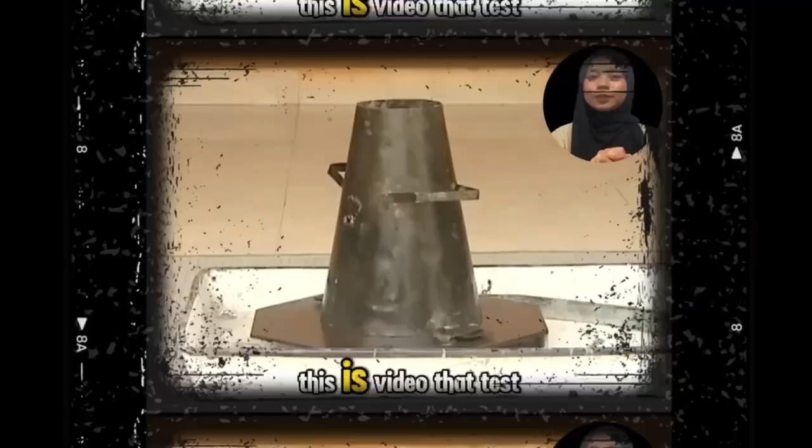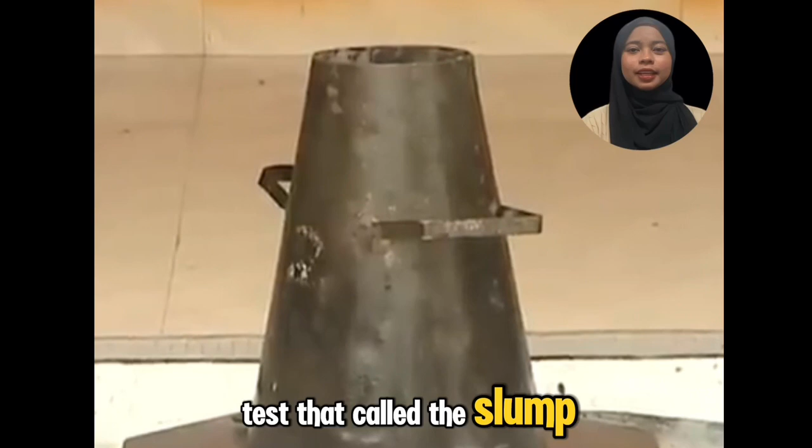This is a video that tests for workability of concrete. The ease with which one can work with concrete is called workability. This can be measured using a simple test called the slump test. This video will show the procedure. The slump test is simple and always used on site to assess the workability of a concrete mix. The test should be conducted at the beginning of concrete operations.

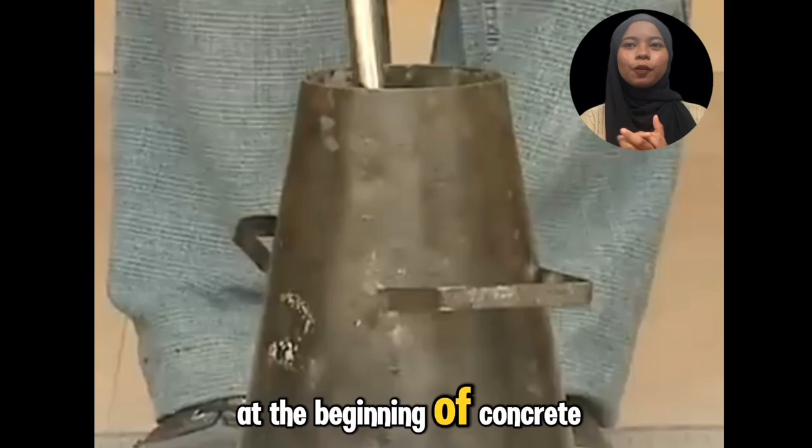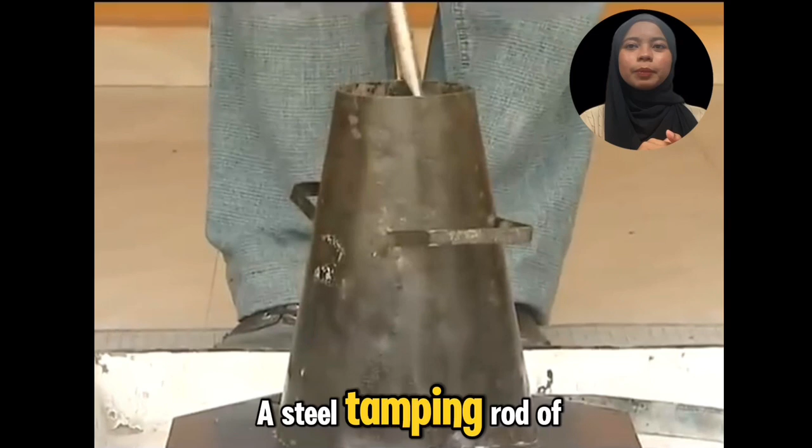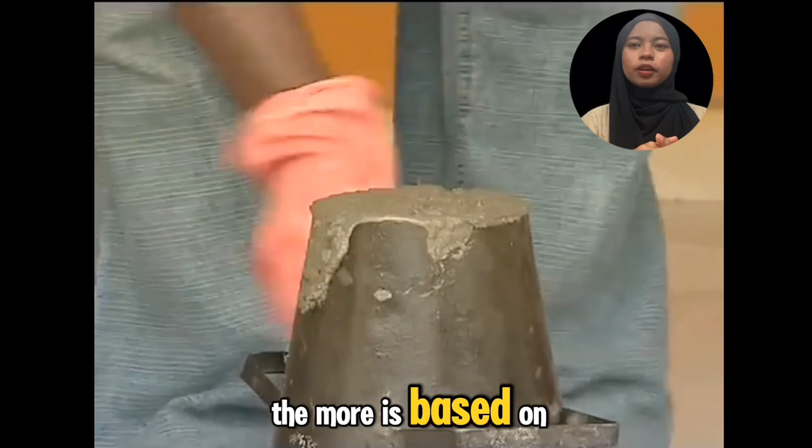The apparatus for conducting the slump test essentially consists of a metallic mold in the form of a frustum of a cone with a base plate. A steel tamping rod of 16mm diameter and 60 cm height is to be used for compacting. The internal surface of the mold should be thoroughly clean of moisture. The mold is placed on a smooth, horizontal, rigid and non-absorbent surface.

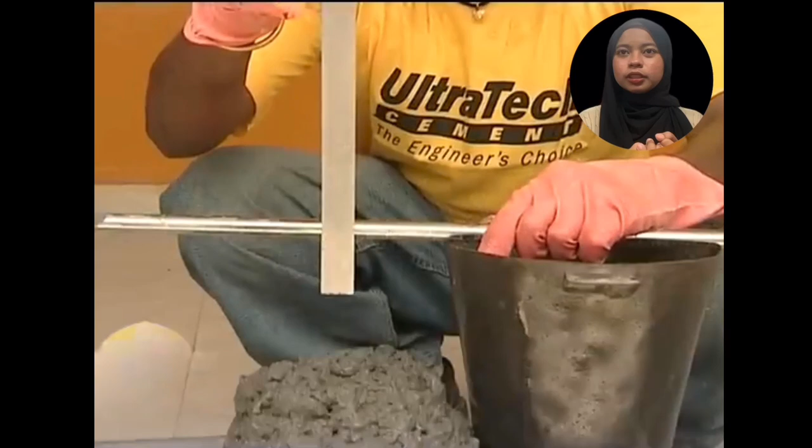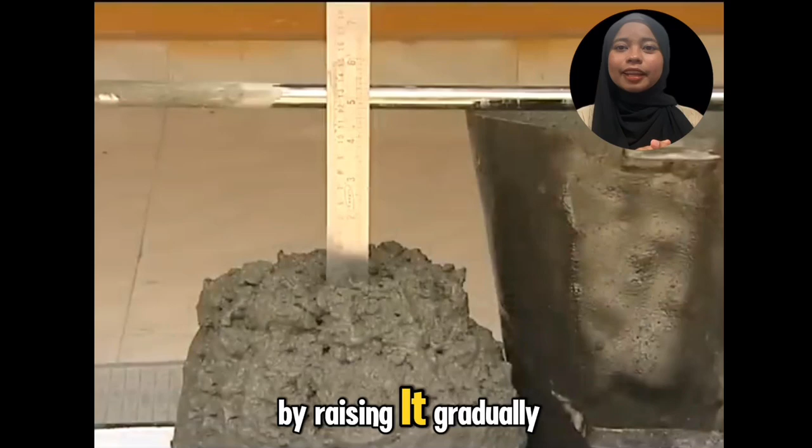It is then filled in 4 layers with the thickness of each layer being more or less 1/4 of the height of the mold. Each layer should be tamped 25 times evenly. The concrete is leveled with a trowel so that the mold is filled exactly to the top. The mold is then removed by raising it gradually. This operation should be carried out without any jerk and vibration.

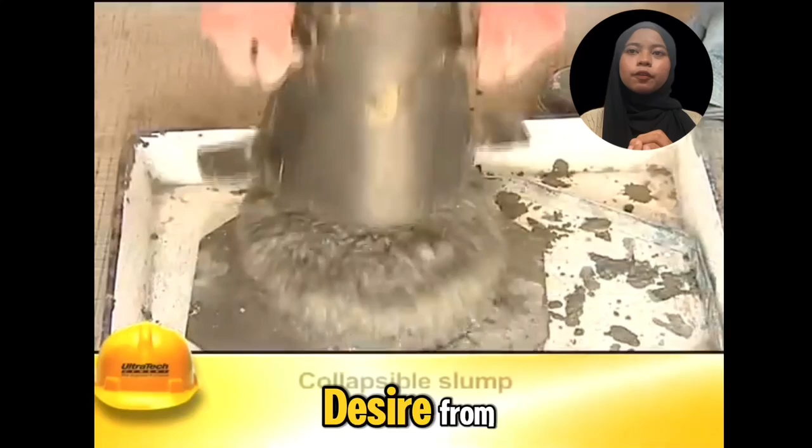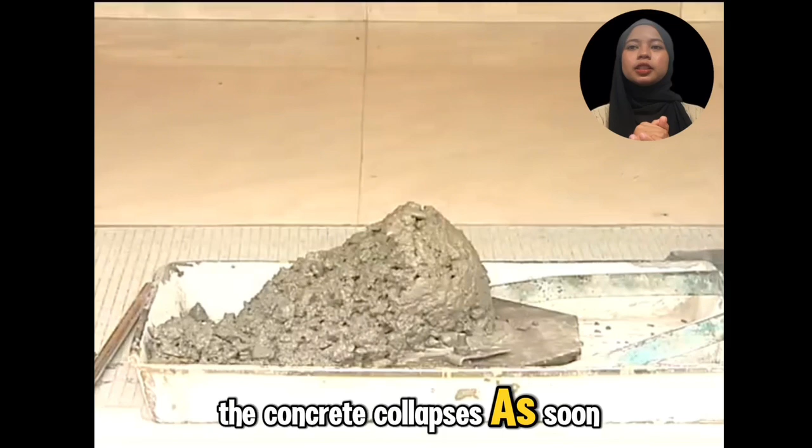The slump may either be a true slump, shear slump or collapse slump. The true slump is the desired form, a slump that we require. In harsh mixes, the concrete slides in an inclined plane. This is known as shear slump. In collapse slump, the concrete collapses as soon as the cone is removed, usually occurring in very wet mixes. Concrete demonstrating near a collapse slump is considered unsatisfactory.

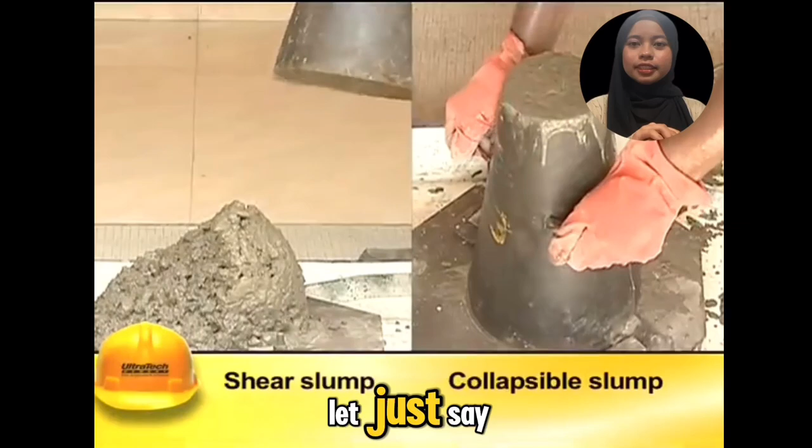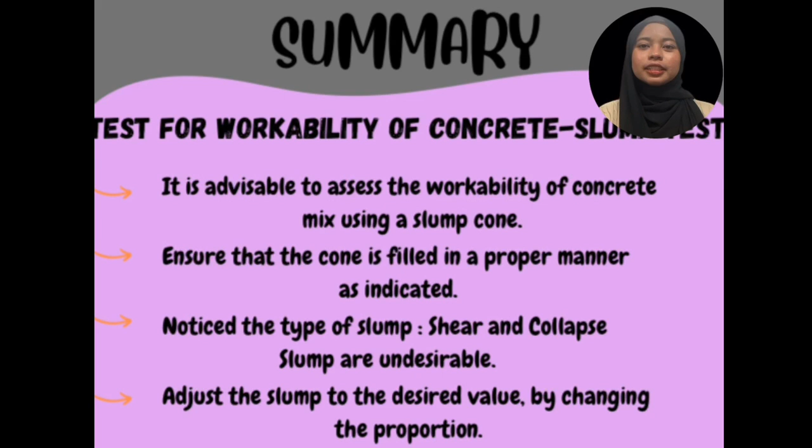In case of a slump result beyond the specified limit, the mix proportion needs to be adjusted, especially the water content. For the summary of tests for workability of concrete: first, it is advisable to assess the workability of a concrete mix using a slump cone. Second, ensure that the cone is filled in a proper manner as indicated. Third, notice the type of slump. Shear and collapse slumps are undesirable. Lastly, adjust the slump to the desired value by changing the proportion.

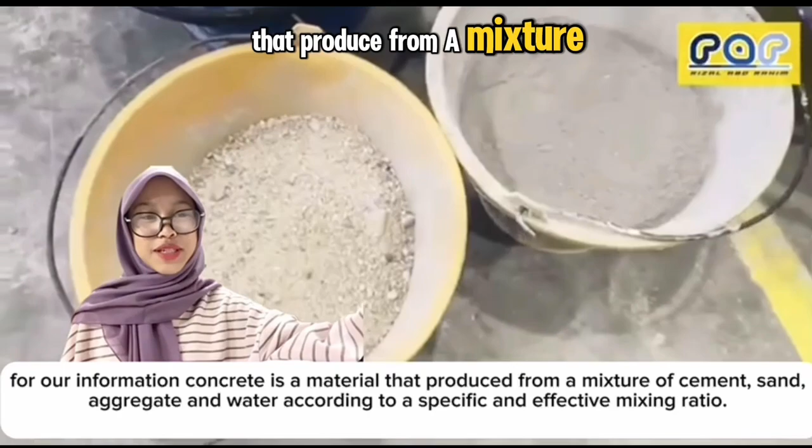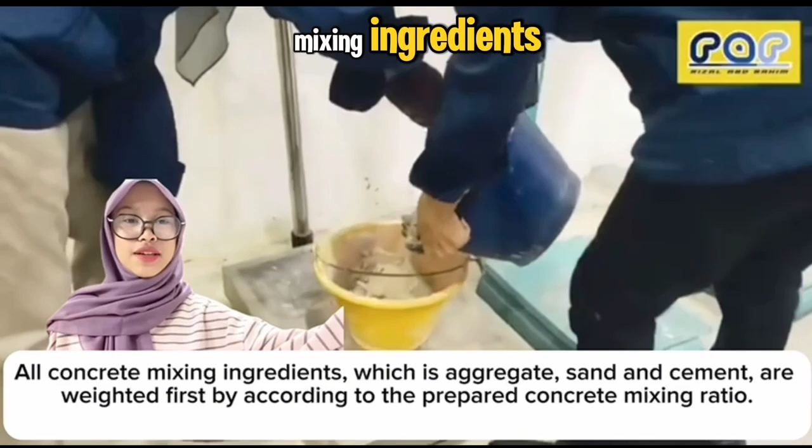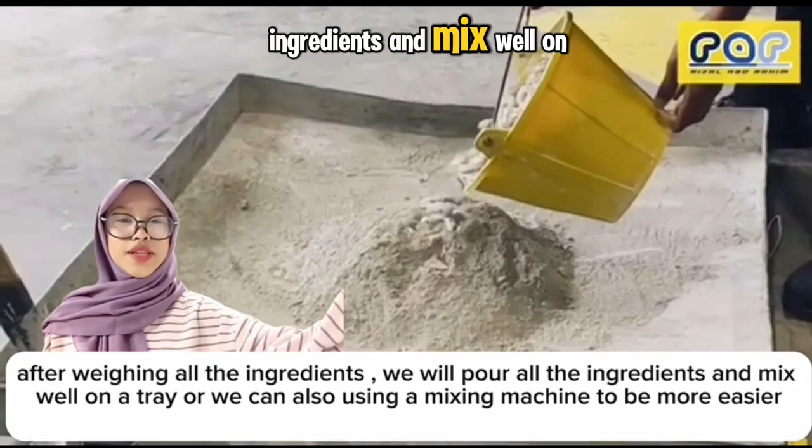For our information, concrete is a material produced from a mixture of cement, sand, aggregate and water according to a specific and effective mixing ratio. The equipment required is a shovel, trowel, compaction rod, compaction machine, and a concrete cube mold made of steel. First, the concrete mixing ingredients, which are aggregate, sand and cement, are weighed according to the prepared concrete mixing ratio. After weighing all the ingredients, we pour them and mix well on a tray, or we can use a mixing machine to make it easier.

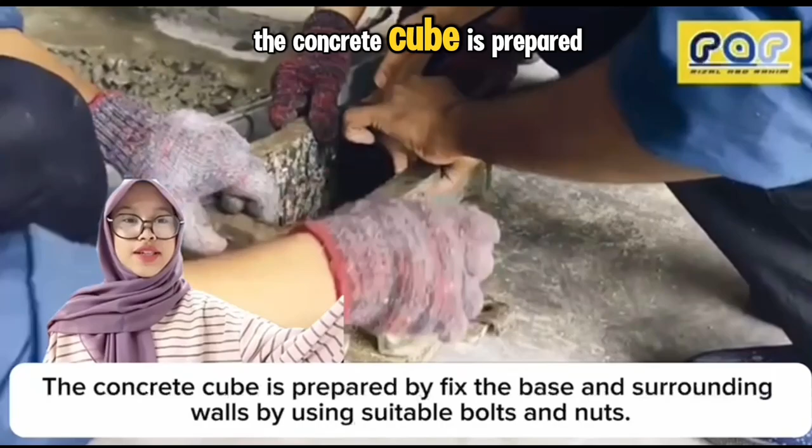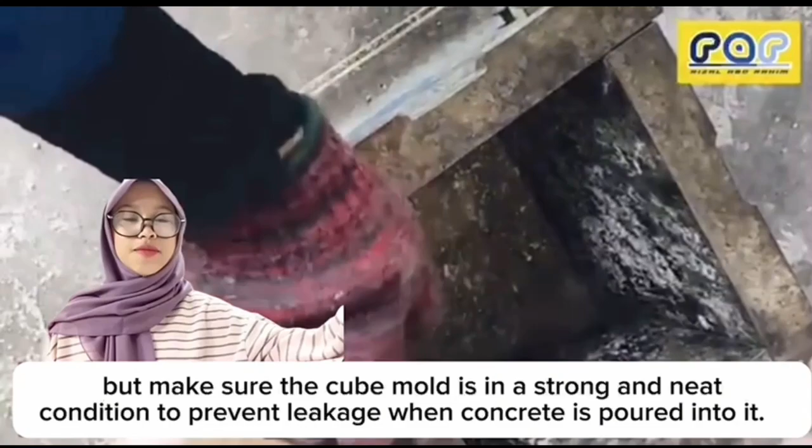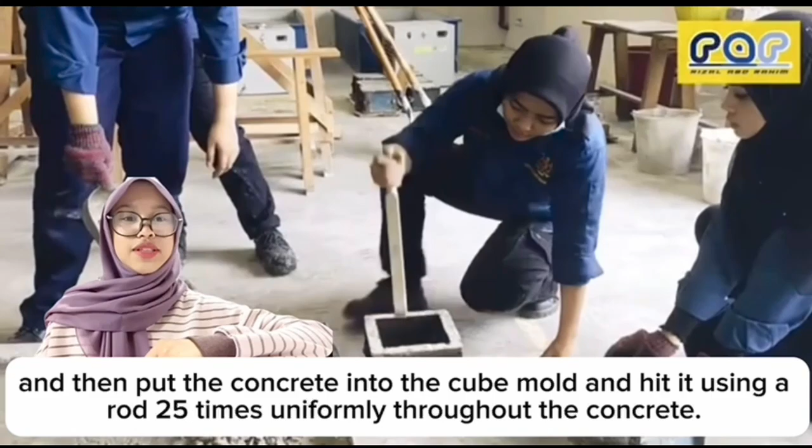Next, add clean water according to the proper ratio and mix all until smooth. The concrete cube is prepared. Fix the base and surrounding walls using suitable bolts and nuts, but make sure the cube mold is in a strong and neat condition to prevent leakage when concrete is poured into it. Then the inner surface of the cube is rubbed with grease or oil first, and then put the concrete into the cube mold and compact it using a rod 25 times uniformly throughout the concrete. This step is repeated on the second and third layers until the concrete cube mold is full and solid.

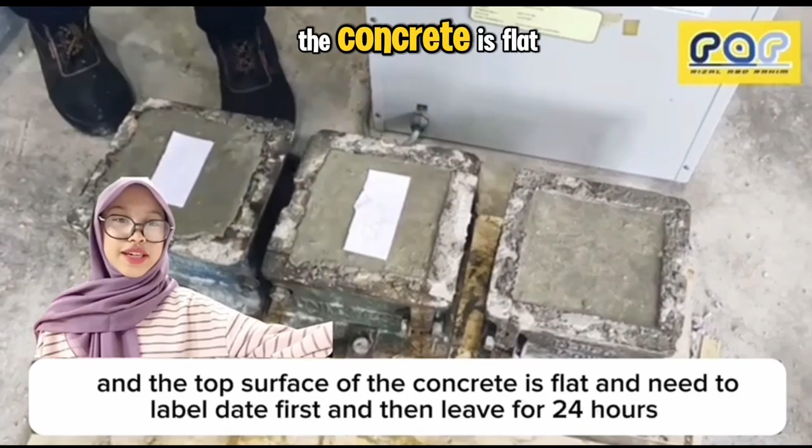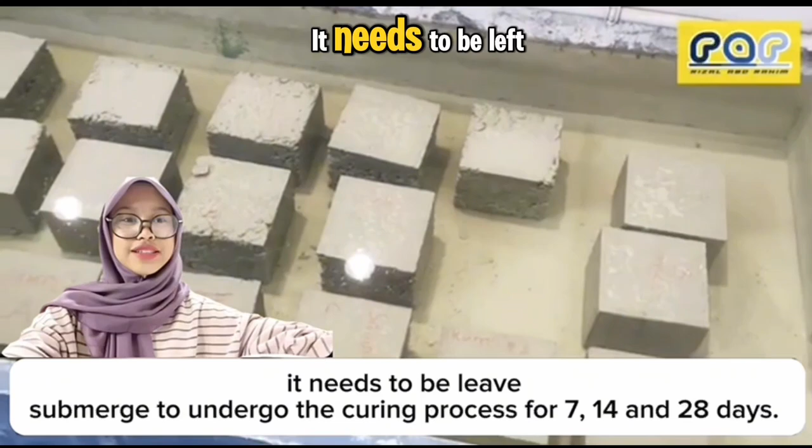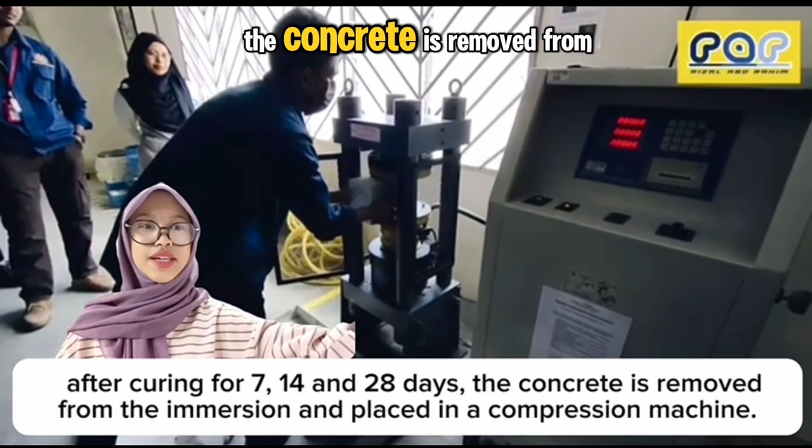The top surface of the concrete needs to be leveled flat, and then left for 24 hours. After 24 hours, the cube mold is carefully opened and the cube placed in a water tank. It needs to be left submerged to undergo the curing process for 7, 14, and 28 days. After curing for 7, 14, and 28 days, the concrete is removed from the water and placed in a compression machine. Compression pressure is applied slowly until the cube breaks and the result can be recorded.

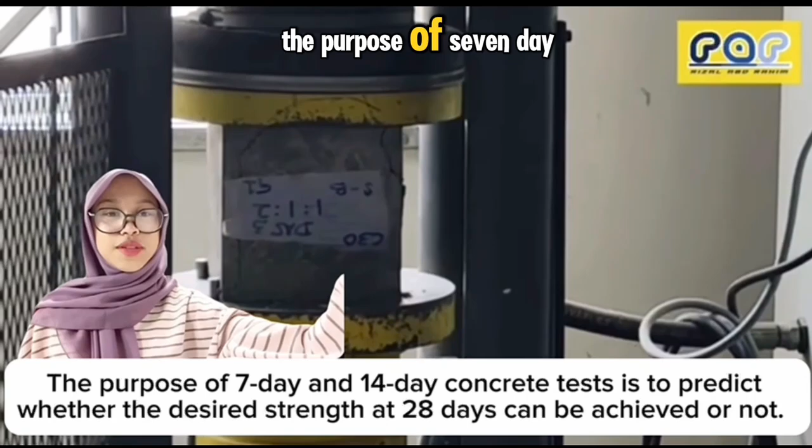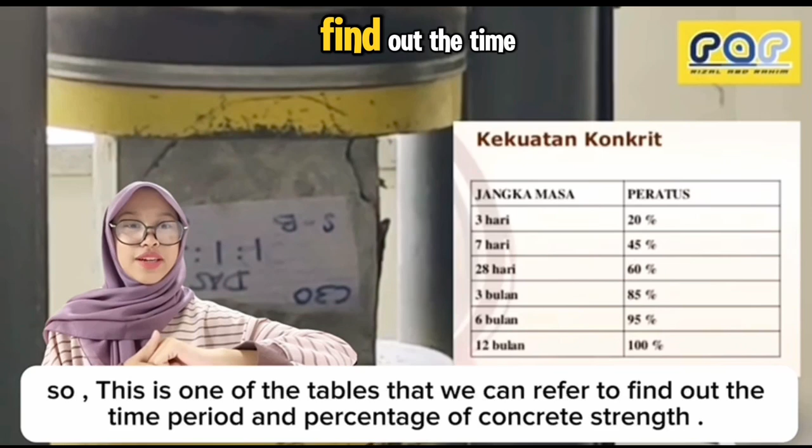The purpose of the 7-day and 14-day concrete tests is to predict whether the desired strength at 28 days can be achieved or not. So this is one of the tables that we can refer to to find out the time periods and percentage of concrete strength. So we can summarize that the longer the concrete is soaked in water, the higher the strength of the concrete.

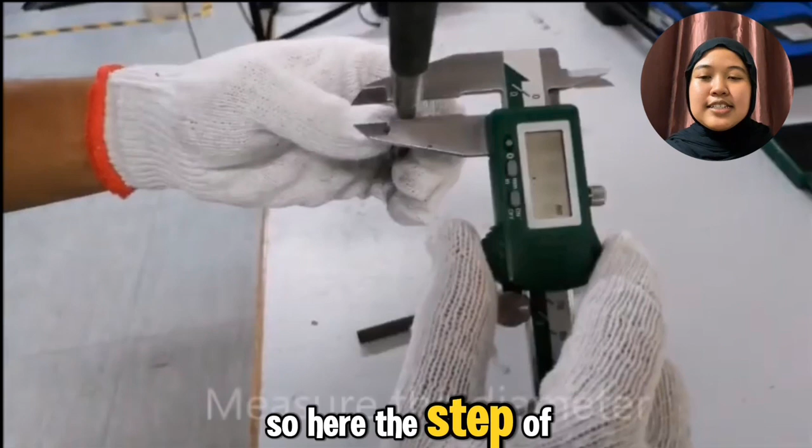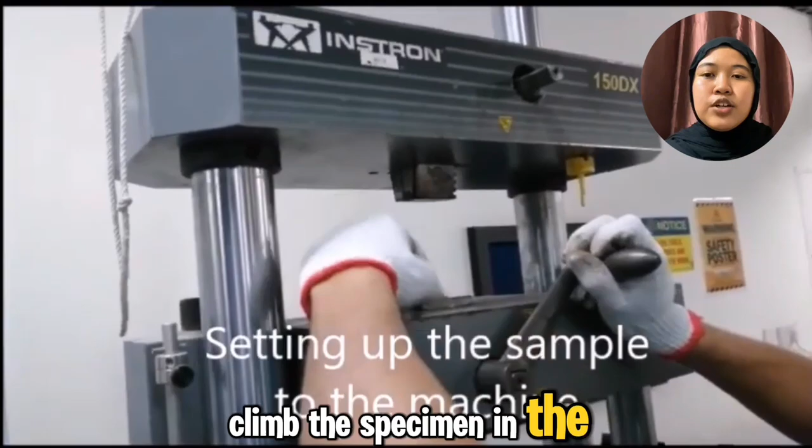So, for steel tensile testing, we need an extensometer, digital caliper, tempered steel, quenched steel, stainless steel, and a universal testing machine. So, here are the steps of steel tensile testing. Firstly, we need to prepare the steel specimens. Second, measure and record initial dimensions. Third, clamp the specimen in the universal testing machine. Then, we need to set the machine parameters on the control panel or software.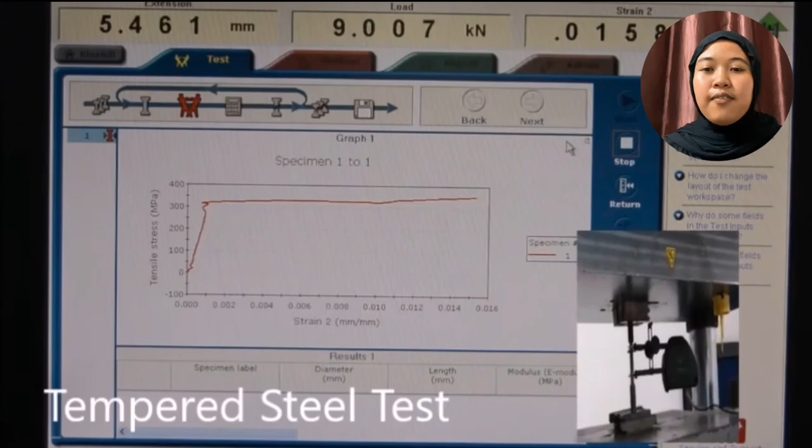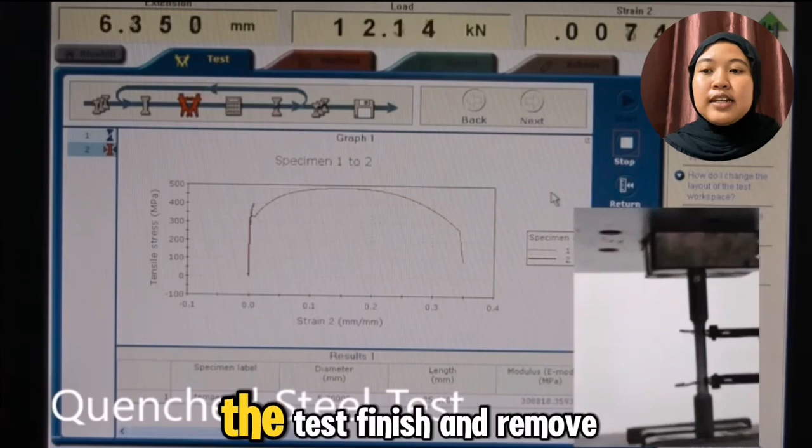Next, start the tensile test. After that, we need to monitor load and extension data as the sample elongates. We can observe material behavior. Once the specimen breaks, the test finishes and we remove the sample. Lastly, we need to analyze the results using recorded data to determine mechanical properties.

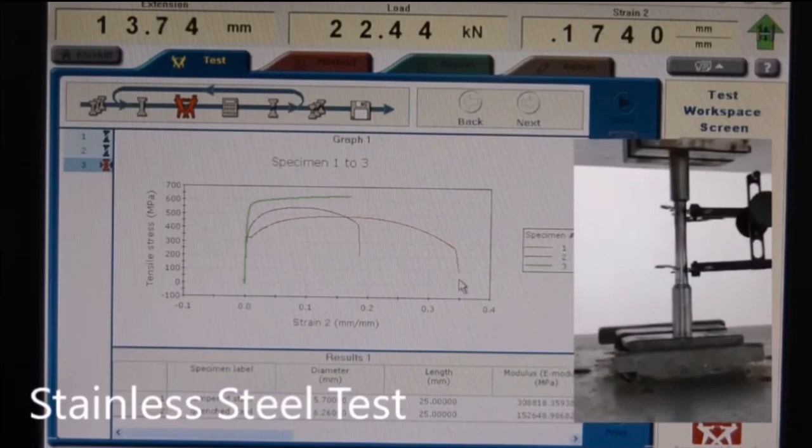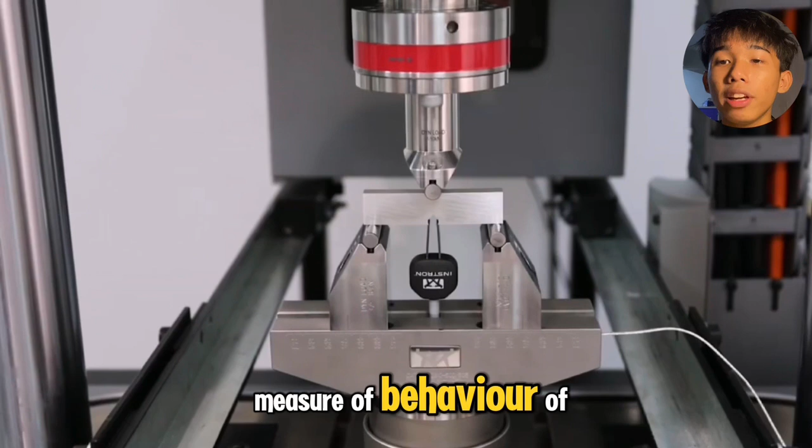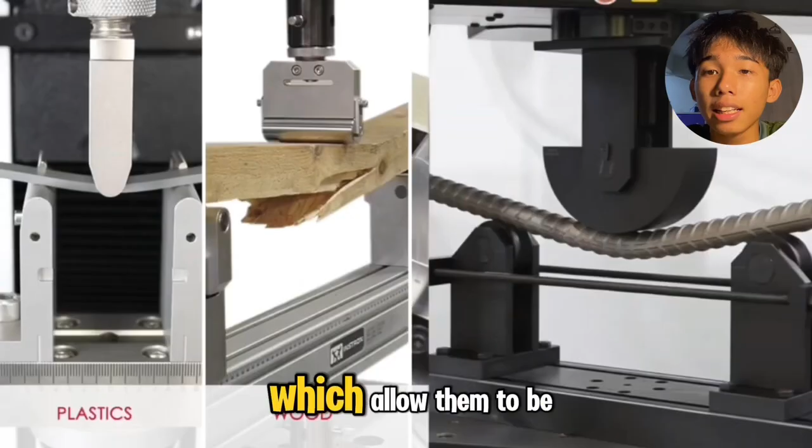What is a bend test? It's a form of mechanical testing that can be performed on a universal testing machine. Engineers use bending testing to measure the behavior of steels subjected to simple beam loading. While many people think of the material as being brittle, they are often relatively ductile, which allows them to be used as a support structure like skyscrapers, bridges, and others. Bending testing is performed to mimic realistic loading situations.

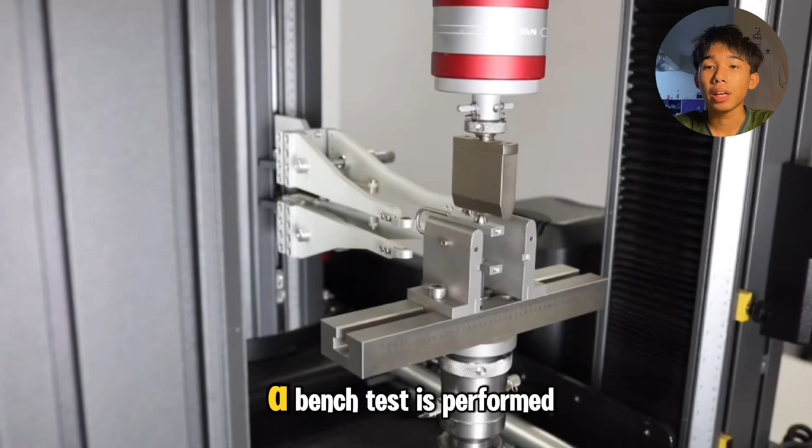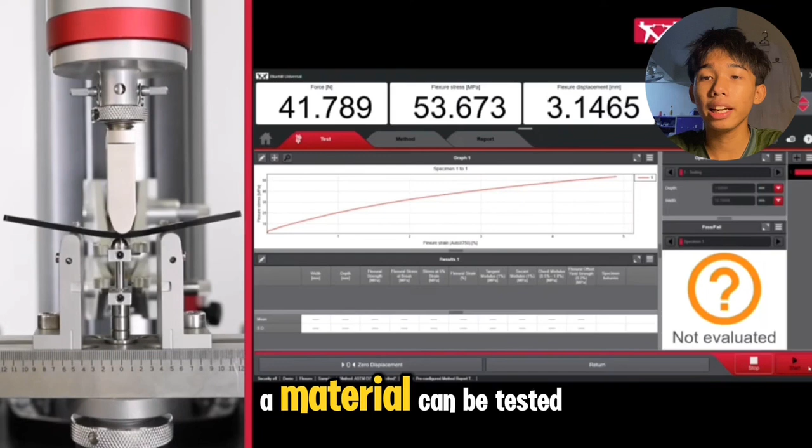A bend test is performed using a 3-point or 4-point bend fixture, which applies force in different ways depending on the requirements. A material can be tested to a specific load or strain. Properties measured include flexural stress, flexural strain, flexural modulus, and flexural offset yield strength.

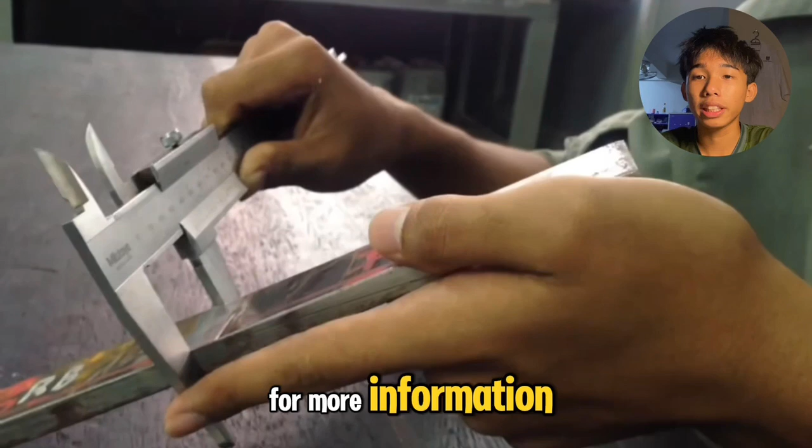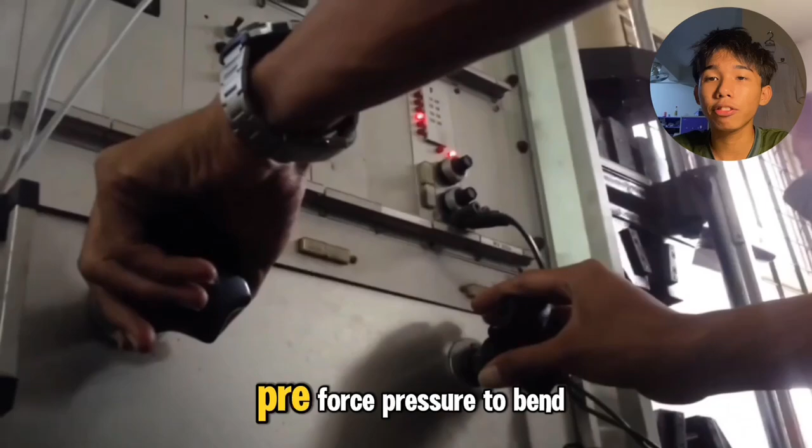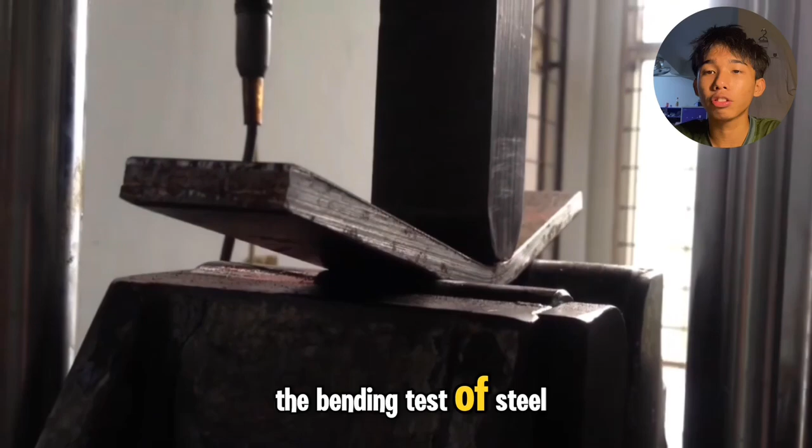For more information, here is the demonstration of the bending test. So first, you measure the steel that you want to test, and then set up the force pressure to bend the steel, and then place the steel you want to test under the point, and you are ready to do the bending test of steel. Here you can start the machine and press the steel being tested until it breaks. You can test different types of steel using this bending test.

Steel is an alloy of iron, carbon, and other elements. Steel has high strength and lower cost than other materials. Steel is available in various forms, for example, solid, plate, and hollow form. And the types of steel usually used in construction are alloy steel, carbon steel, reinforced steel, and stainless steel.

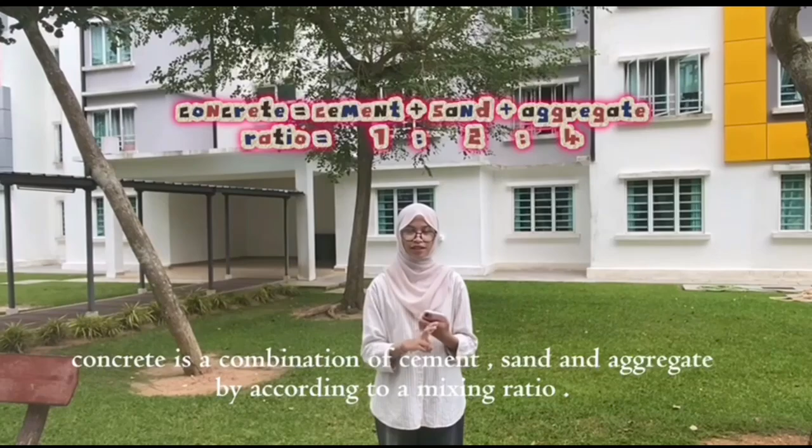Now we go through to the other material, which is concrete. Concrete is a composite material that is usually used in construction. Concrete is a combination of cement, sand, and aggregate, according to a mixing ratio. The types of concrete usually used in construction are permeable concrete, reinforced concrete, high strength concrete, and normal strength concrete.

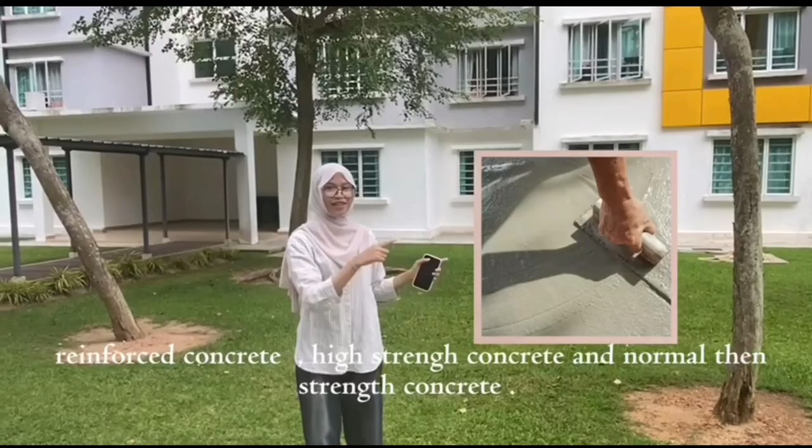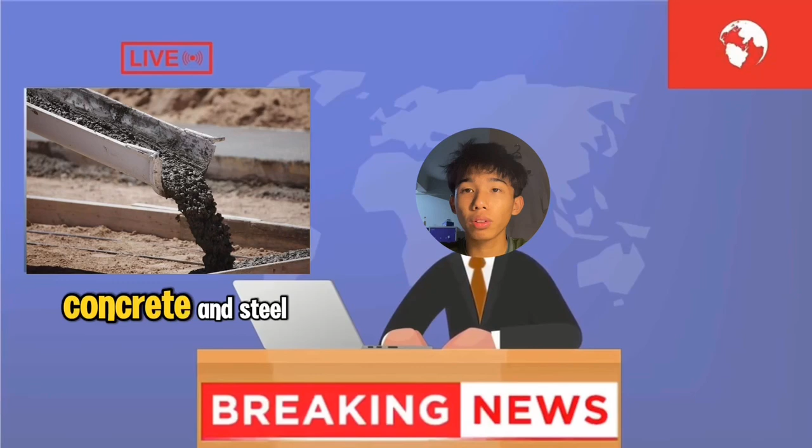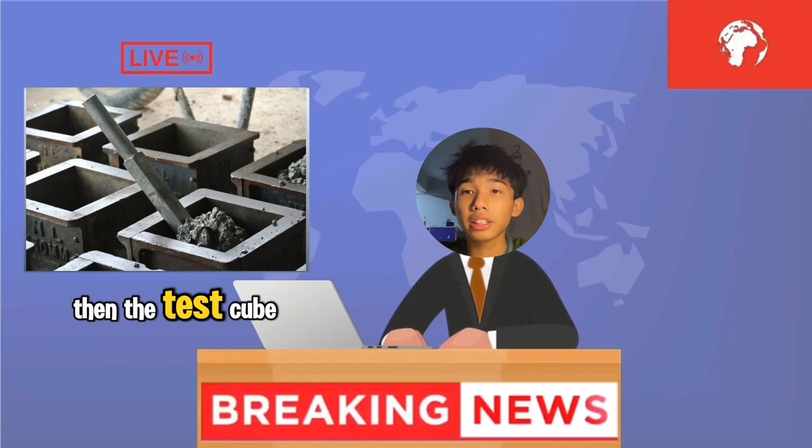For this section, we are looking at the engineering properties and characteristics of both concrete and steel through a few common tests. For concrete, we use the slump test to check the workability of fresh concrete, basically how easy it is to mix and place. Then, the cube test is used to measure compressive strength, which tells us how much load the hardened concrete can resist.

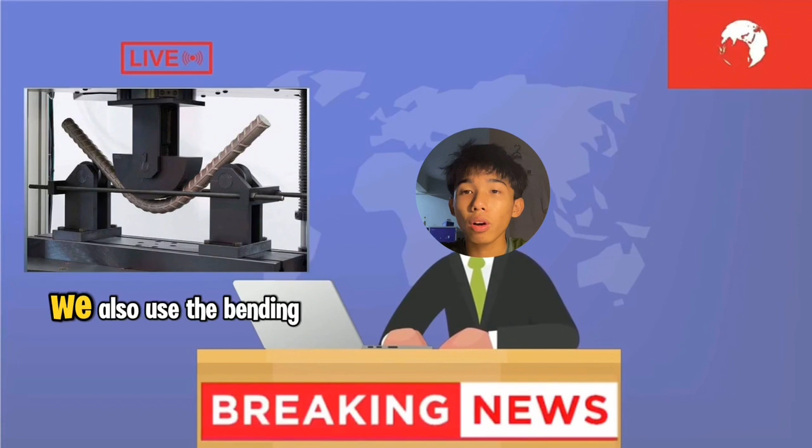For steel, we have the tensile test, which measures how strong the steel is when being pulled and how much it can stretch before breaking. We also use the bending test to see how well steel can flex without failing. Together, these tests help us understand key engineering properties like workability, strength, durability, and overall performance of the material in construction.

Steel, like any construction material, has its own advantages and disadvantages. Understanding both sides helps us to choose the right material for different types of structure. So this is the advantage and disadvantage of steel in construction.

For advantages, steel components are usually prefabricated in the factory. Steel is also 100% recyclable, environmentally friendly, and also reduces construction risk. For disadvantages, steel is quite expensive and also a fire risk, as it loses strength at high temperature.

In construction, concrete is one of the most widely used materials. Although it offers many advantages, it also has several disadvantages that must be considered. Here is the advantage of concrete in construction. It can withstand high pressure and also has good fire resistance. It can perform better at high temperature.

Concrete structures are very heavy, so foundation cost will be higher. Concrete needs a curing period of 7 to 28 days to achieve full strength.

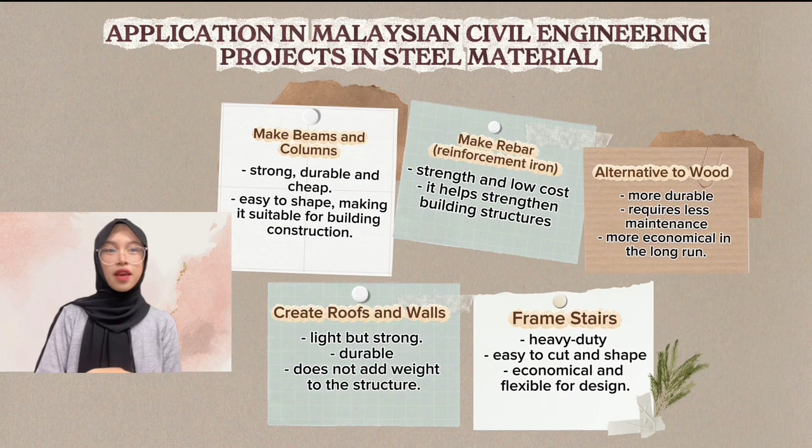And the last one, frame stairs. Steel is used to build stairs because it is heavy duty, easy to cut and shape, and it is also economical and flexible for design.

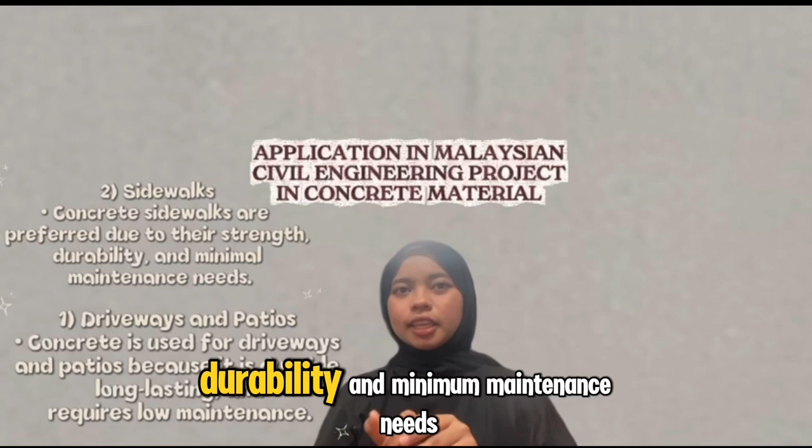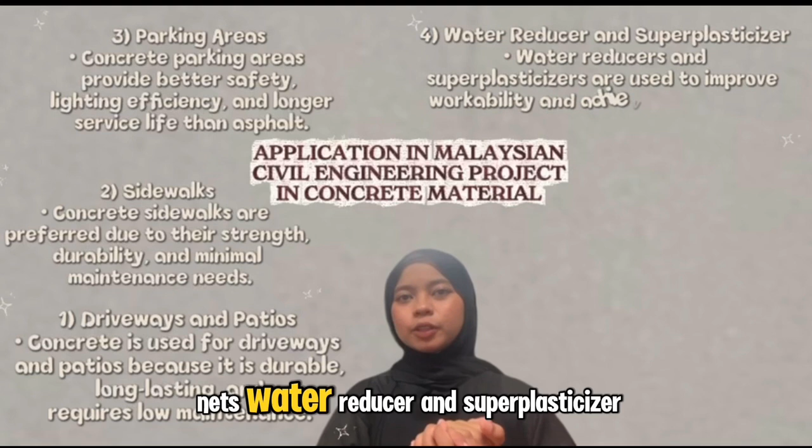Third, concrete parking areas provide better safety, lighting efficiency, and longer service life than asphalt. Next, water reducers and superplasticizers are used to improve workability and achieve the required slump in high-performance concrete.

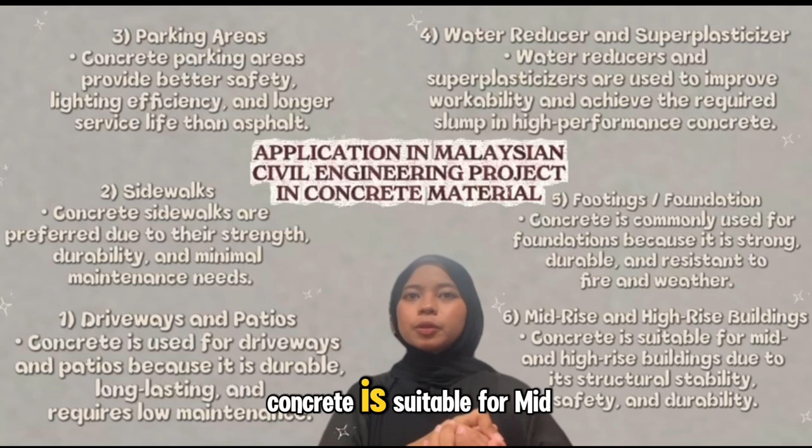After that, concrete is commonly used for foundations because it is strong, durable, and resistant to fire and weather. And lastly, concrete is suitable for mid and high-rise buildings due to its structural stability, safety, and durability. So that's all for the application in Malaysian civil engineering projects of concrete material.

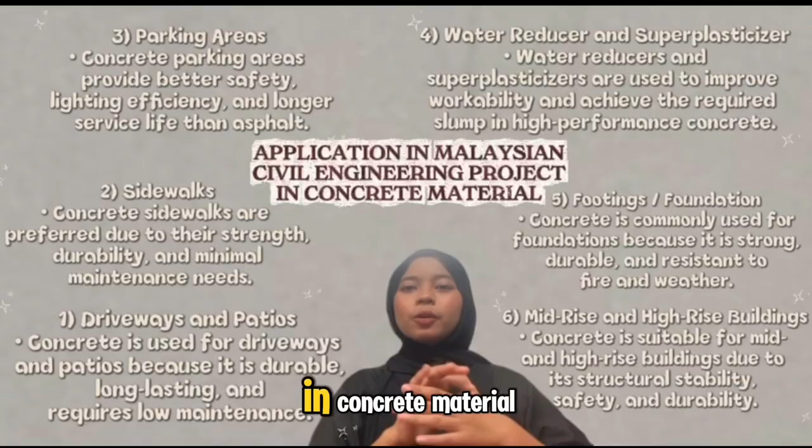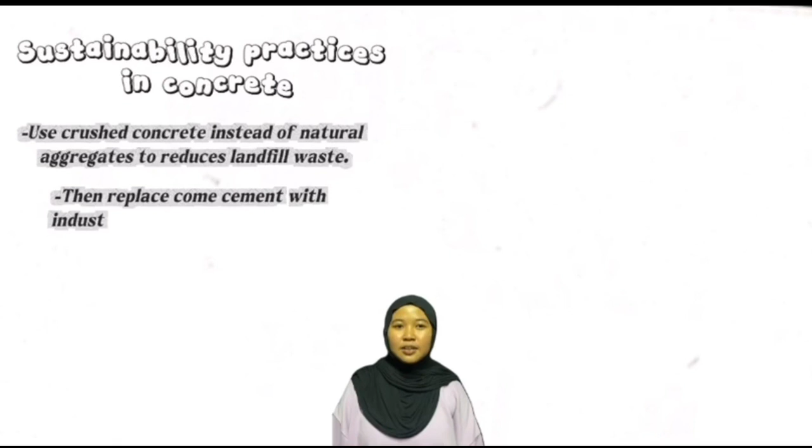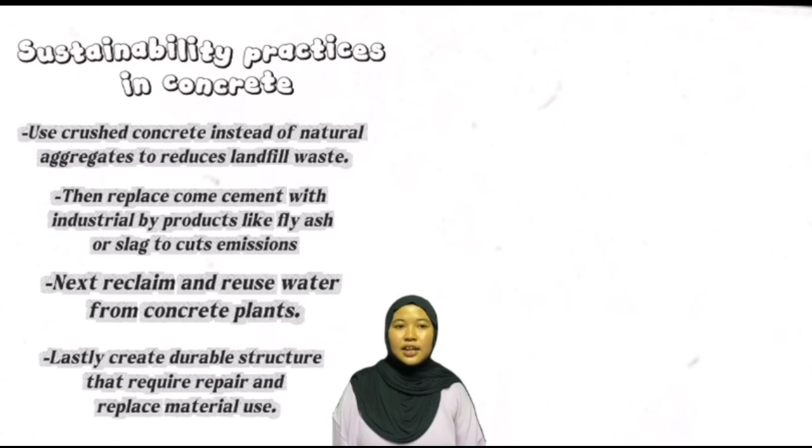Sustainability practices in concrete. Use crushed concrete instead of natural aggregates to reduce landfill waste. Then replace cement with industrial byproducts like fly ash or slag to cut emissions. Then reclaim and reuse water from concrete plants. Lastly, create durable structures that require less repair and replacement material use.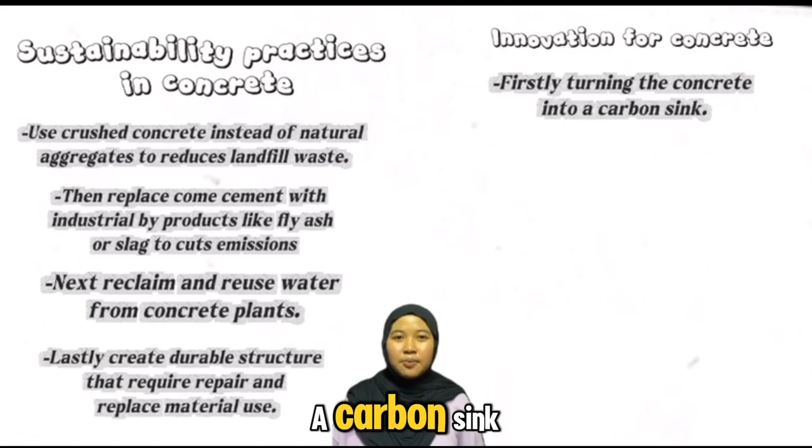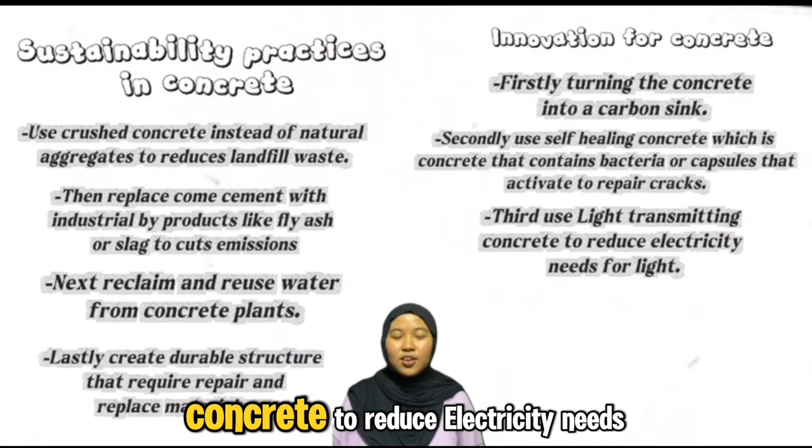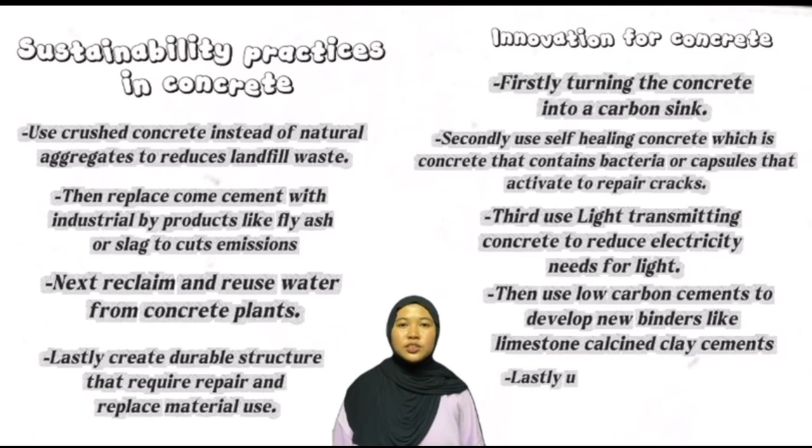Innovation for concrete. Firstly, turning the concrete into a carbon sink. Secondly, use self-healing concrete, which is concrete that contains bacteria or capsules that activate to repair cracks. Third, use light-transmitting concrete to reduce electricity needs for light. Then use low carbon cements to develop new binders like limestone calcined clay cement. Lastly, use 3D printed concrete that allows for precise material use and reduces waste.

Sustainability practices in steel. Firstly, we need to maximize recycling. For example, use electric arc furnaces to cut energy and raw material needs. Secondly, use waste heat recovery to reduce energy consumption. Third, use renewable energy such as solar or wind. Then, reduce fresh water use through recycling and advanced treatment. Lastly, optimize processes to minimize raw material waste.

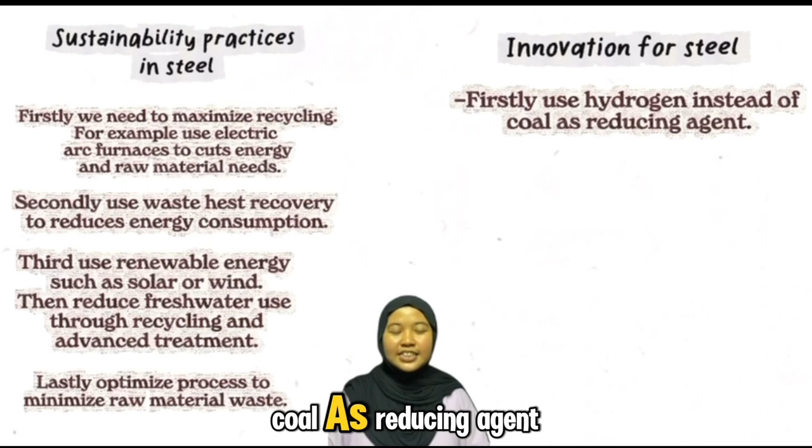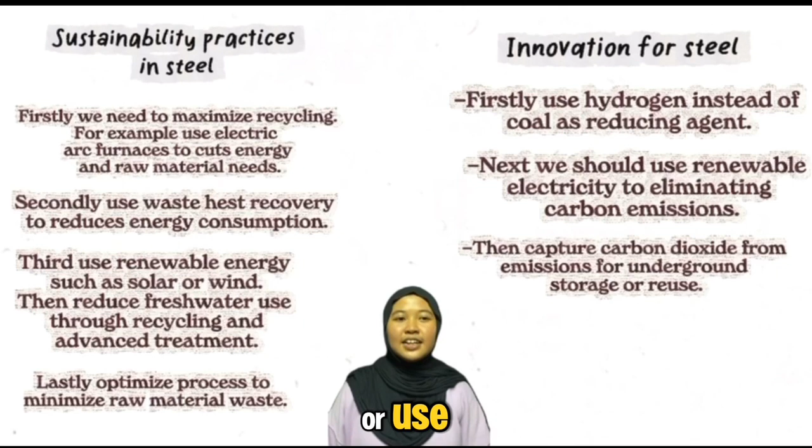Innovation for steel. Firstly, use hydrogen instead of coal as the reducing agent. Next, we should use renewable electricity to eliminate carbon emissions. Then, capture carbon dioxide from emissions for underground storage or use. Lastly, use data for better resource management and efficiency.